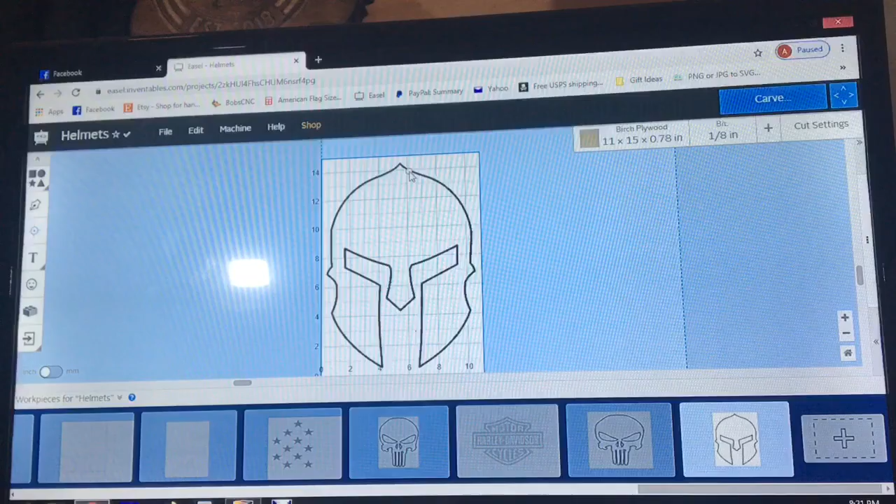Alright, so we have the Spartan outline right here. This is the one we're going for. We're wanting to make the carve that's going to outline the union. The way we want to do it is pretty simple. We want to make sure we're on a line, which we're on this line right here. Let me zoom in just a little bit so you can see better. Alright, so I want to put my union line down here simply because it's just easier when I'm setting up the stripes to be on a line.

So we're going to click it, make sure it's red. That means it's even. And we're wanting to go to that line right here, 8. So let's make it right. If I could get it right, there we go. Alright, so right there, if we make it a little bit over the Spartan helmet, that's fine.

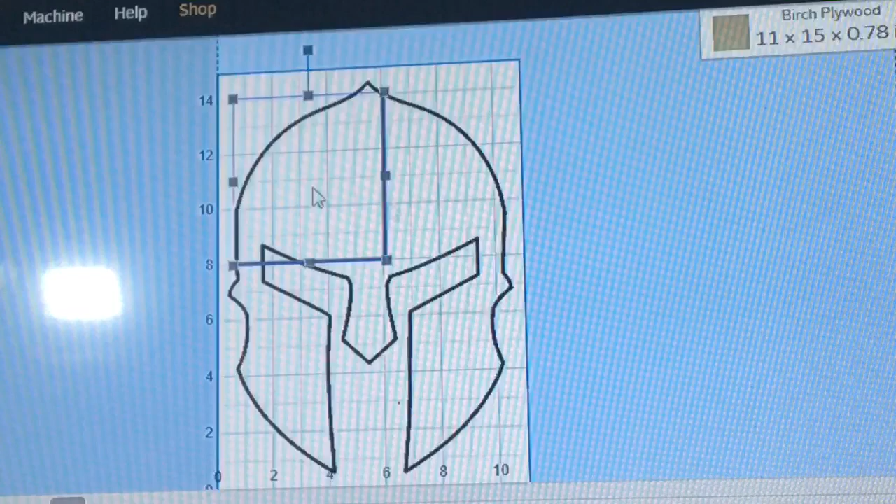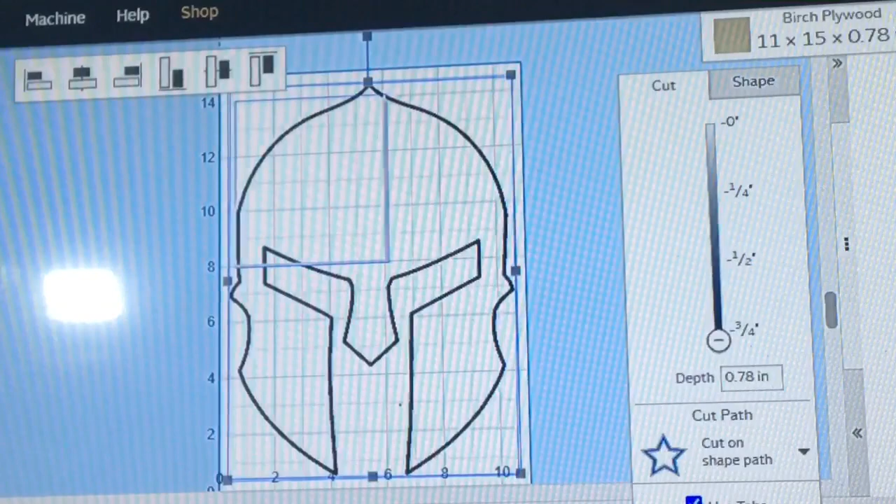Alright, so what we want to do, and bring this over here so you can see it, we're going to set that line to 0.05, like that. Alright, that's the first thing that we want to do. Alright, so let's go ahead and copy this, Control A, Control C, and we want to make 4 more, can't see it, but 4 more basically projects of the same thing.

Let me zoom out. So down here, you want 4 total, not 4 more, but 4 total. And so what you'll do is you'll copy this thing into all of them. Alright, so on the first one, because the first cut we want to do is just that line. We don't want to cut out the Spartan helmet yet, so we'll delete that. Alright, that left that union mark still there. That's going to be our first cut.

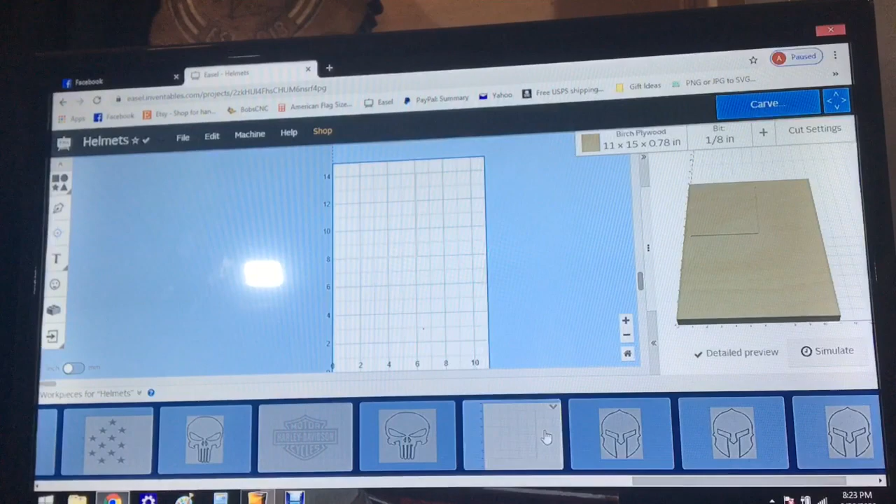So let's go over here. This is the exact same, everything's in the exact same spot as the other one. Alright, so now what we want to do is, because we're using a 1/8 end mill bit, we want to kind of do 2 cuts in a row where it's the same bit, so I'm not having to change it out. So what we're going to do now is we're going to do the stripes that we're going to be cutting out. Now, the black that you see right here is actually going to be the natural color, because I'm going to be staining it.

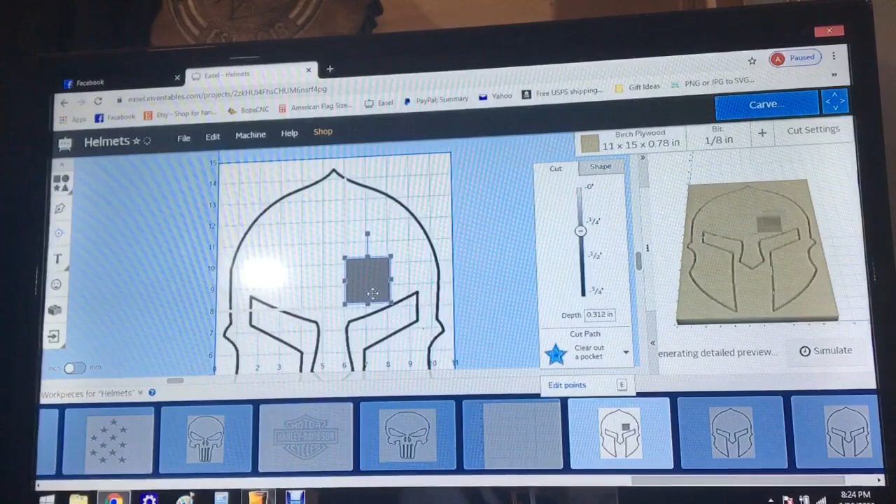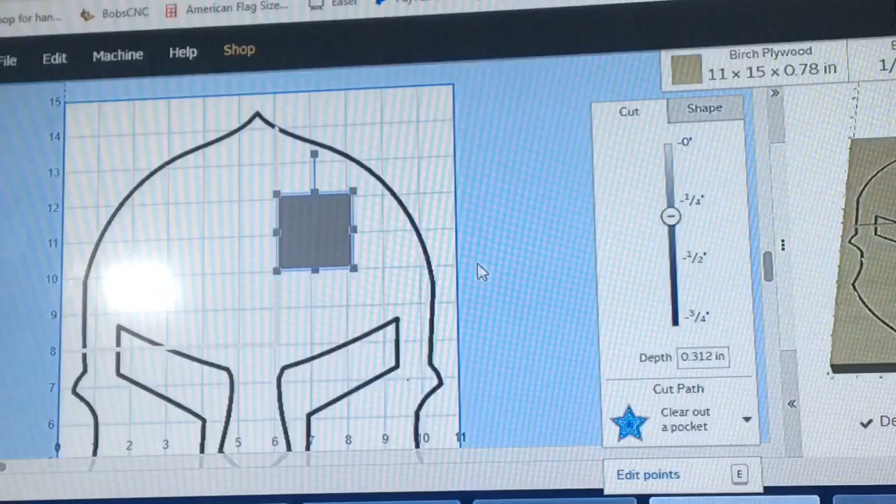So you want to put these stripes where the natural color stripes would be. So we know that first stripe right there equal to the union is red, so we don't want to carve that. So we're going to make our stripes 2 inches wide. So we know we want it right here. So let me zoom back in. Alright, hopefully it doesn't autofocus the whole time. Looks like it is. Alright, so let me zoom back out just a touch, and maybe it won't auto zoom.

Alright, so we want to use the shape tab to get it just right. So this spot is right at 12, so we want to make sure that number is 12, and it's going to line up perfectly with that. And the bottom of this stripe is 10, so we want to make sure this is changed to 10. Alright, so we know now this is perfectly in this area. So let's go ahead and spread it all the way until it gets past that just a little bit.

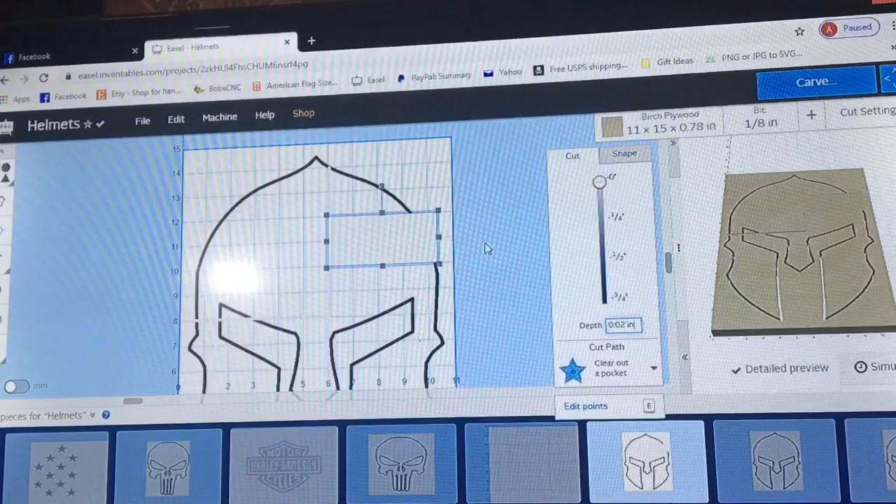Alright, so let's go ahead and change the cut, and we're going to change it to barely taking off any, so I want 0.02. Alright, now let's go ahead and copy this and paste so we get another one. Control C, Control V. Maybe I can click on it. Control C, Control V. There we go. Alright, actually I don't need another one up there, because as you can see, since our stripe is 2 inches, this block represents 1 inch, and that block is a 1 inch square. So I don't need any above it.

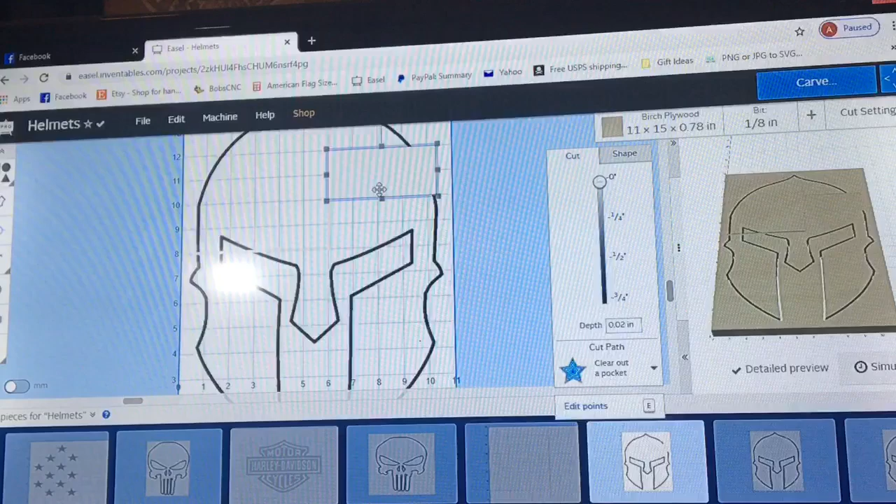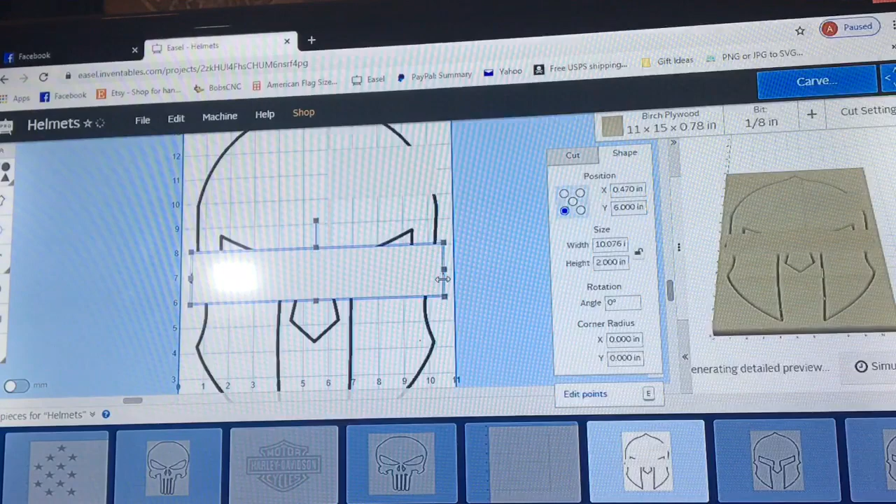So now that's red, so I know this one's going to be natural, so I'm going to have to cut that. So let's Control C, Control V that again. Let's bring it down here as close as possible. I'm going to go back to the shape tab. Alright, this one doesn't really matter on these ones. It's this one that matters. We want it right on 6 so it's even. Alright, and let's stretch it all the way across so it covers everything. There is going to be some wasted carved areas. I'm sure there is a way around it, but I'm not getting into that right now.

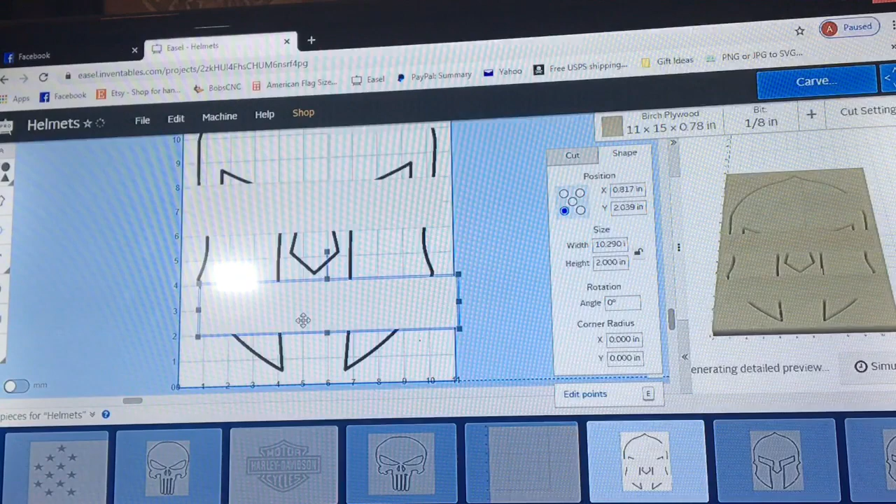So we're going to Control C that, Control V to make another one. So we know that one. So that's a 2 inch stripe. This is also going to be a 2 inch stripe. So let's get this one. This one's going to be right at 2. That way we know it's even. And we can bring this in just a little bit, so that we are eliminating some of the brackets.

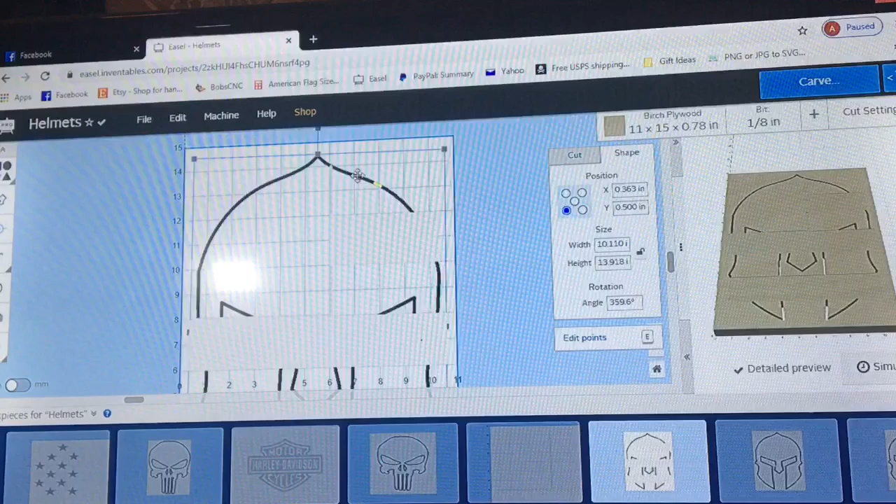Okay, so that's got our stripes set up. I know it looks funny over here, but trust me, it should work. So now what we want to do is delete the outline, delete this, because we don't need that to cut again. That is the second carve we're going to do.

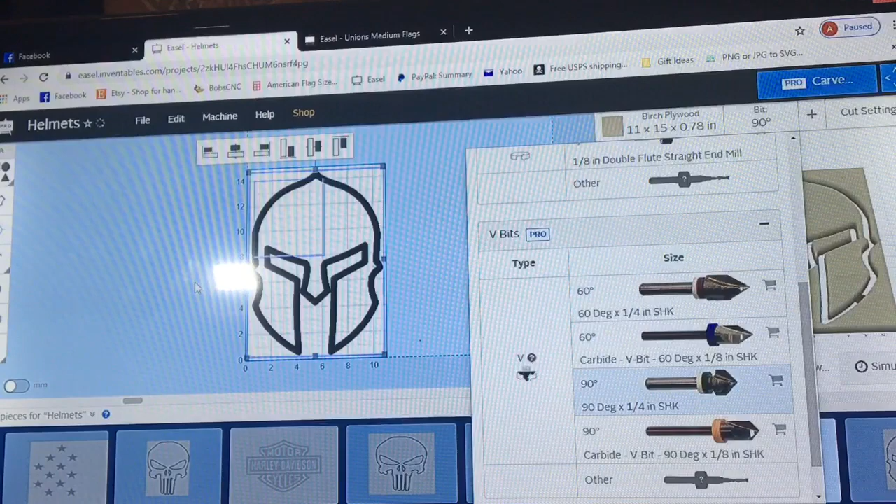Now the third one is going to be stars. Let me go ahead and open, oh, wrong thing, hold on. Go ahead and open up one of my star ones, just so I can get the star. Have that loading. So this is where we're going to want the stars. Now this one, we're going to have to change the bit to a 90-degree V bit, right there. Just ignore all this craziness right now. I went ahead and got the whole union.

Sorry for the autofocus. I do not understand why it's doing it.

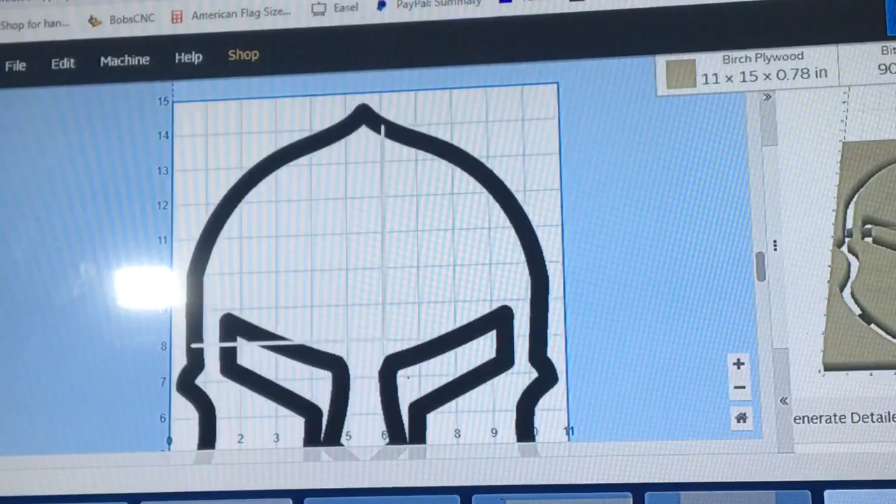Let's go ahead and zoom this in just a little bit, because we only need this top portion for this. Let's move this over just a touch so it's center screen. Now we're going to paste the stars that we did. It's going to be all over the thing, but we want to center it, or kind of make it so that it's on the edge correctly. So we know this, and then click off of it.

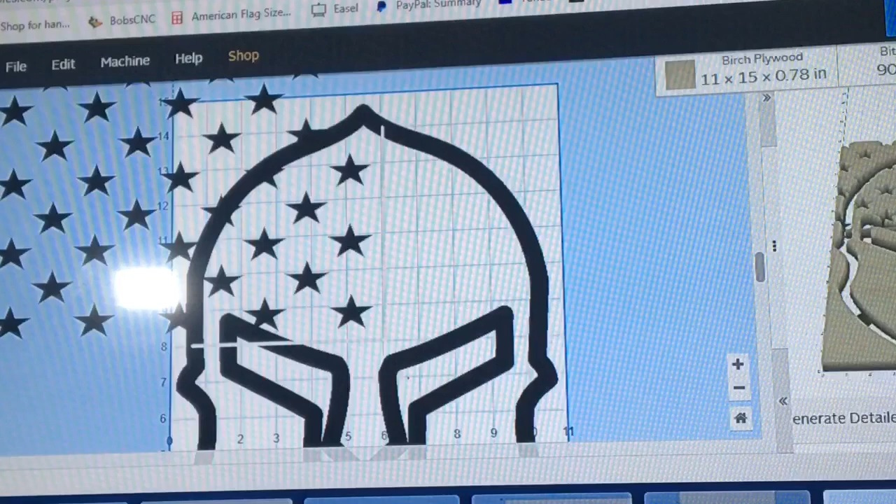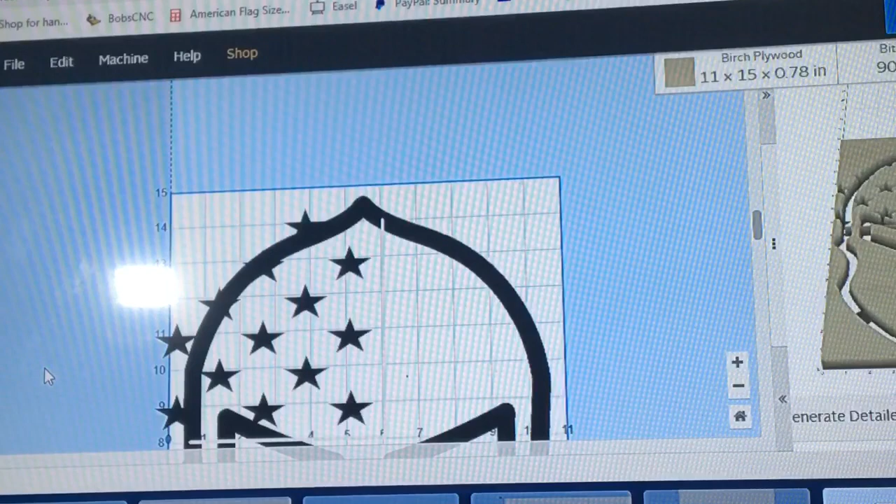So any of it that's touching that line except that one can stay, because it may carve some of it. So let's go ahead and get all these, delete those, delete these, this, and then these three right here. I'll leave those just in case. It may be some wasted area. Actually, I may delete that one, because I'm afraid my clamp may be in the way of that one. And that one, really. I'll delete that one too.

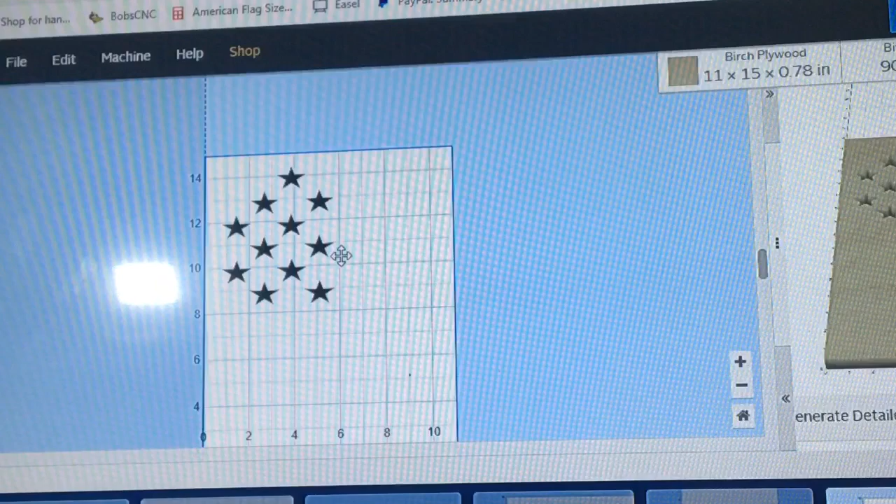Okay, so now, zoom out so you can see we got that. Let's go ahead and delete all the points we don't want to carve. So that's going to be that, and that, and now we're just left with the stars. So that's our third carve. Our fourth carve is going to be this last one we had. We've got to make sure we've got the right bit, 1/8 bit, yep. Let's take this one out, because we don't need this anymore. Click off of it. Delete that, and we'll leave this right here.

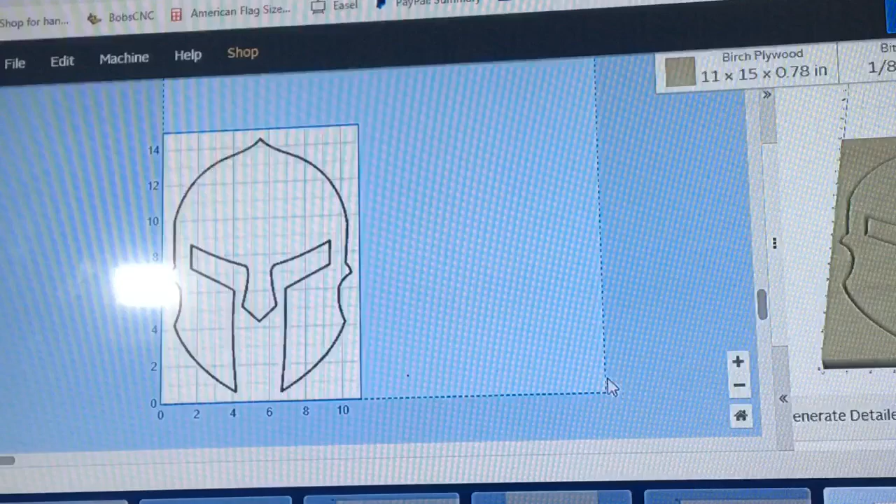So that will be the fourth carve. Actually, I'm going to have to do something else on the CNC machine, because I forgot to put something underneath the board, and when you do cutouts it's good to have something underneath it. So let me save these to show you how to do it real quick. I know I've shown it in other videos, but I'll do it again. Once you're done designing your project, you hit machine. This is with Bob's CNC and using UGS as the controller. Generate G code, export G code.

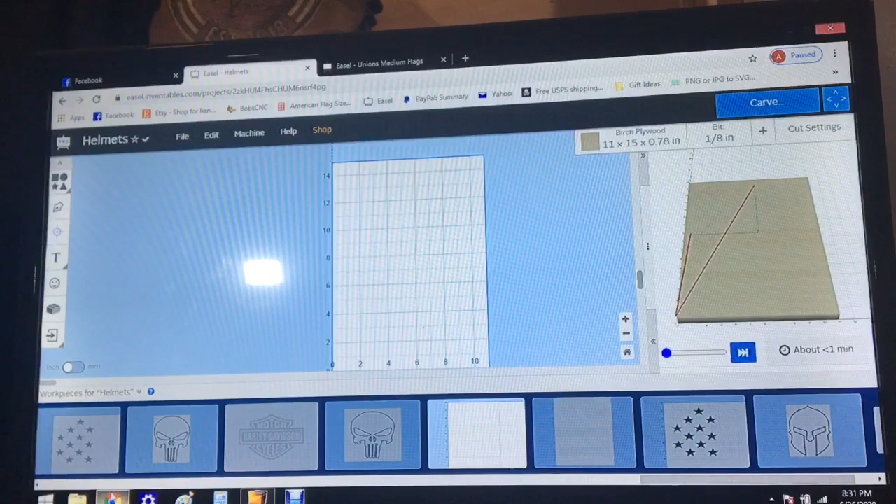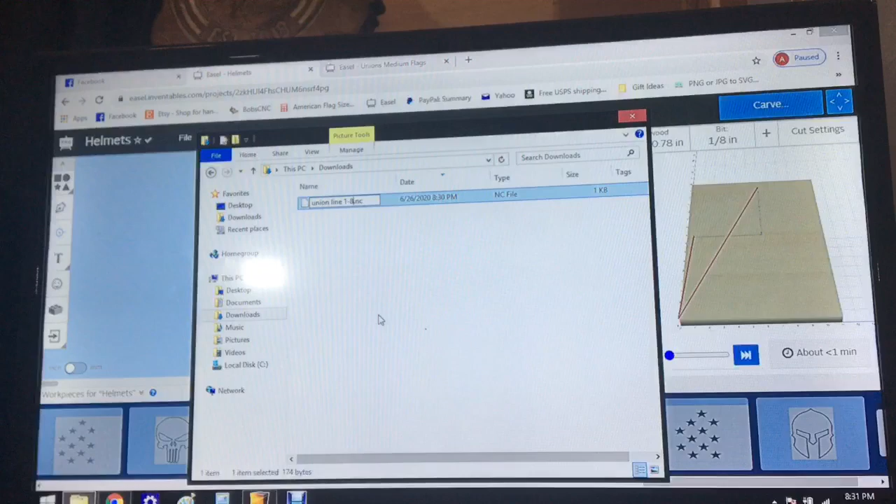Let's zoom you out a little bit. Come on, zoom out. There we go. We exported it. Now let's change that one. Let's make sure we are doing it right. Actually, let's delete all of these just so I'm not getting confused. Rename this. It's going to be Union Line. And I'll put 1/8, just so I know it's a 1/8 bit. Now let's do that with these other ones.

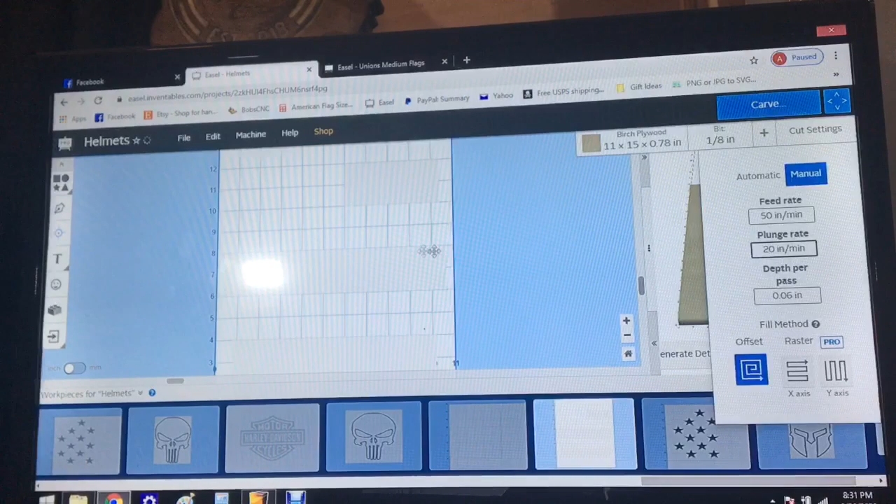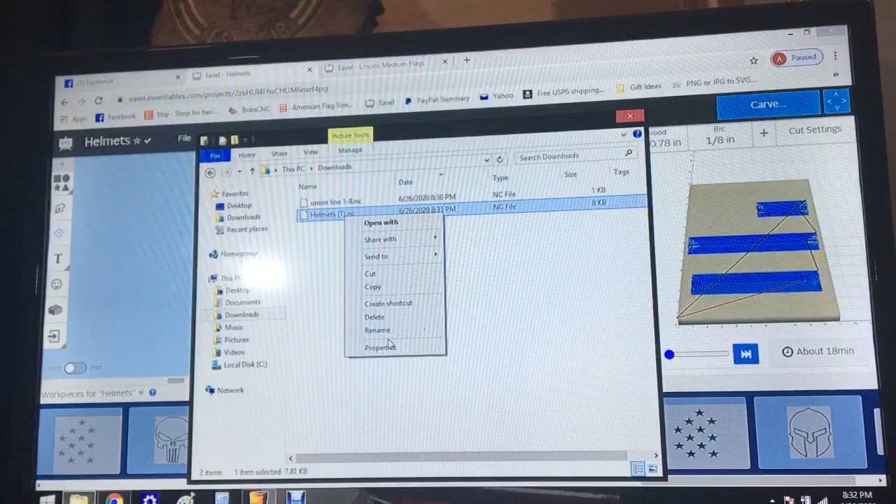Machine, Advanced, Generate G code. Actually, before I do this one, let me double check the cut settings, because they like to do it really slow. Yeah, so let me change that to 20. I know it's manual, but let's do that at 20. Advanced, Generate G code. So it's an 18-minute carve. Export G code. Let's go back into downloads. Let's delete that one, because that's the one I didn't want. It's the newest one. Stripes, 1/8 for 1/8 bit.

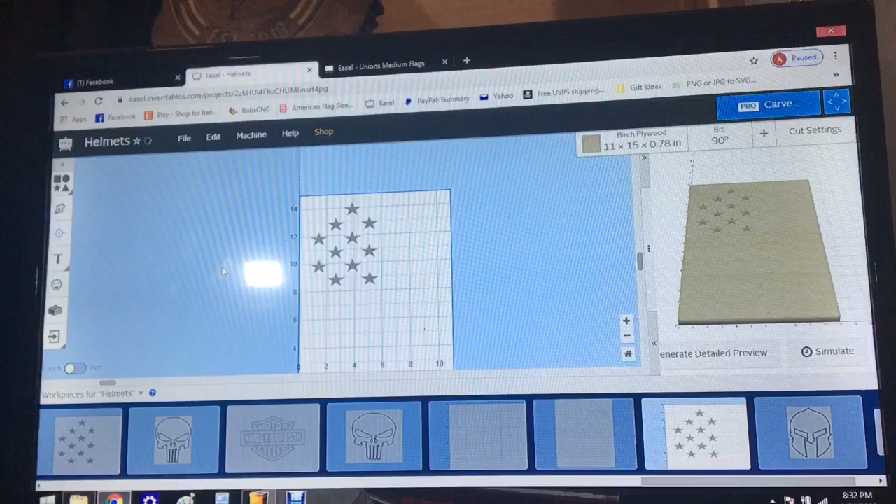This one, I do want to change the depth of these stars. I don't want them deep. I run my stars at 0.25. Some go all the way through, and it gives you great stars too, but I've always had good luck with 0.25. So we're going to machine, advanced, generate G code, export G code. Let's go into downloads and rename this one stars 90 for the 90-degree bit.

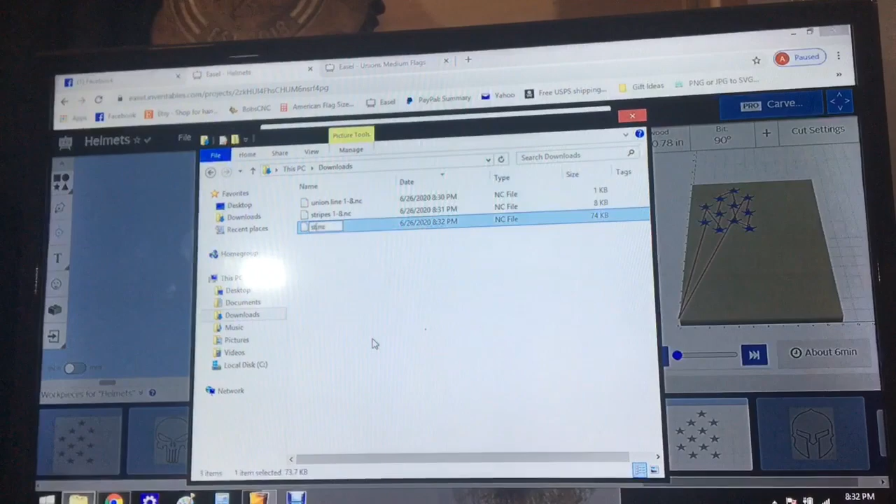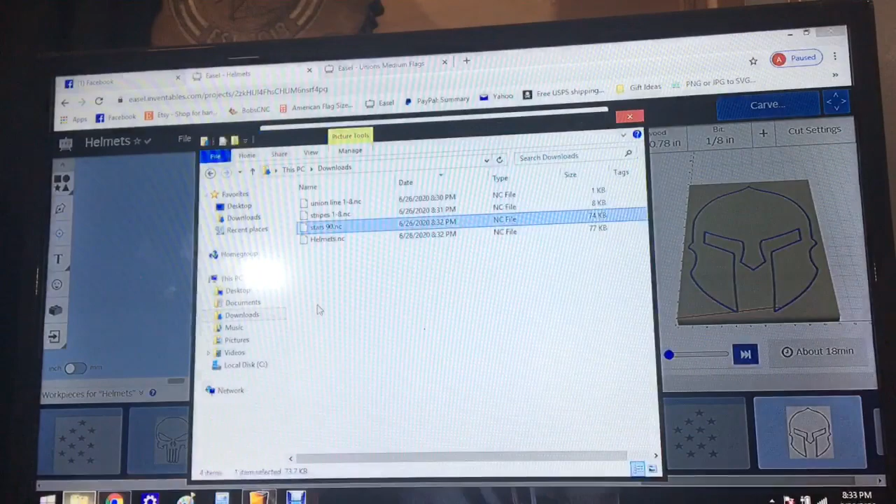And then last but not least, let's check the cut settings of this one again. For a cutout, I'm okay with that being 12. And let's see how long it takes. Yeah, it's just 18 minutes, that's fine. Alright, let's change this last one. It's going to be Spartan cutout 1/8. Alright, so we have all those done.

So let's go to UGS. I already have it connected, but I'll disconnect it just to show you. Make sure you have the power turned on and the USB cord plugged into your computer. And right here, I know mine's COM4. We're gonna hit connect. You're always gonna get that alarm when you first start.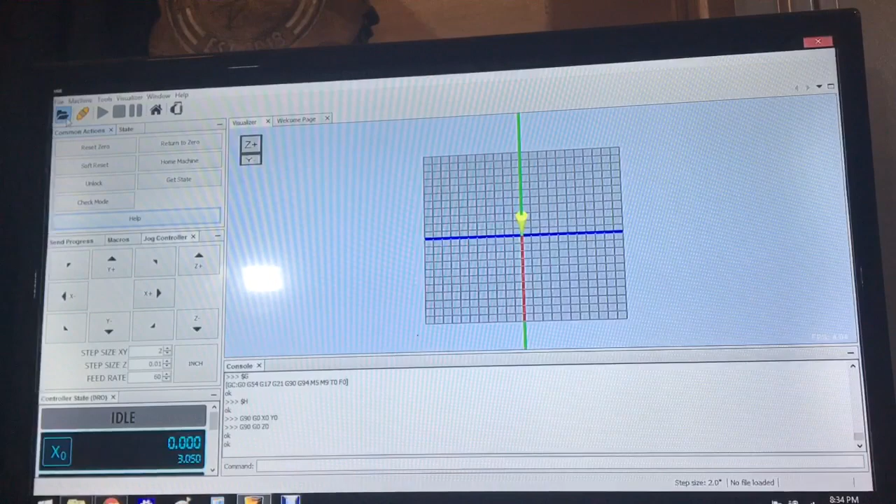We go to where we saved all those, which I think was just in the downloads folder. First one is going to be the union line. We're gonna go upwards. So this is the first one, that's the last one. So let's go union line. Very simple. So let me go ahead and take the board off, put something underneath it, and then we'll get started.

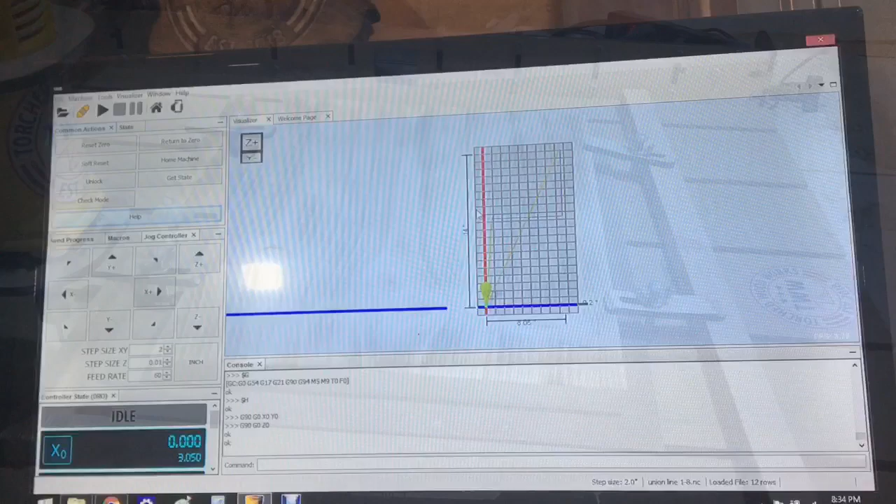All right, so let's get it close to the center point, which is this bottom left corner. Not too far. All right, so now that we got it, that looks good. We're gonna reset to 0. Now raise it up, and now let's check our Z. So let's move this back up to, and we'll do 2.

We're going to check a couple different points, but actually with this one we really don't need to, because it's just the outline of this. So we're kind of close to where the outline is going to be, so let's go ahead and start lowering it down. You want it so it just catches this. Alright, so it's just catching it right there.

So, alright, so let's go back. That went too far. No, perfect. Alright. Gonna reset. Alright, so now we're ready. I'm gonna go ahead and start the cut.

Alright, so that was really short, obviously, because I just had to do this one line. But it marked out where the union needs to be, and the reason I did this step is because now I know where to stain. Yes, they're gonna have a line right here separating the union, but I'm not really too worried about that. I want to see how it looks. So I'm going to stain this top corner blue, and the rest of this is going to get stained red. And I'm keeping it on the machine when I do it.

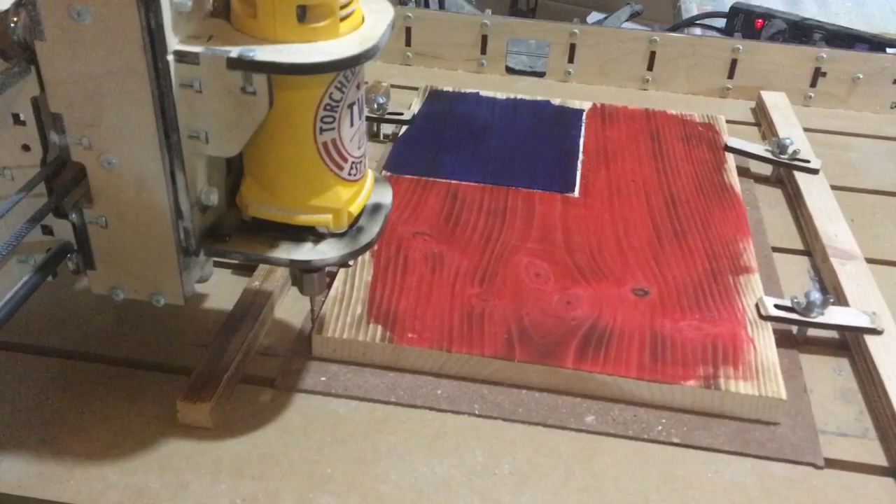Alright, so now that it's mostly dry, there's one spot on the blue that's not dry. We're not carving on the blue. So we're going to hit return to 0. And because I want it to go slightly deeper, so it gets out any of the stain that got into that little channel, I'm going to lower the Z down by 0.02. And then we're going to hit reset 0 again. Alright. And then we're going to run it.

Alright, so the next thing we want to run is the stripe, so we're going to load that into the computer. We're going to return to 0. Alright, so we're at 0 again still. So now all we have to do is run it. Now this is an 18-minute carve, so I'm going to do it in time-lapse format, and we'll be back.

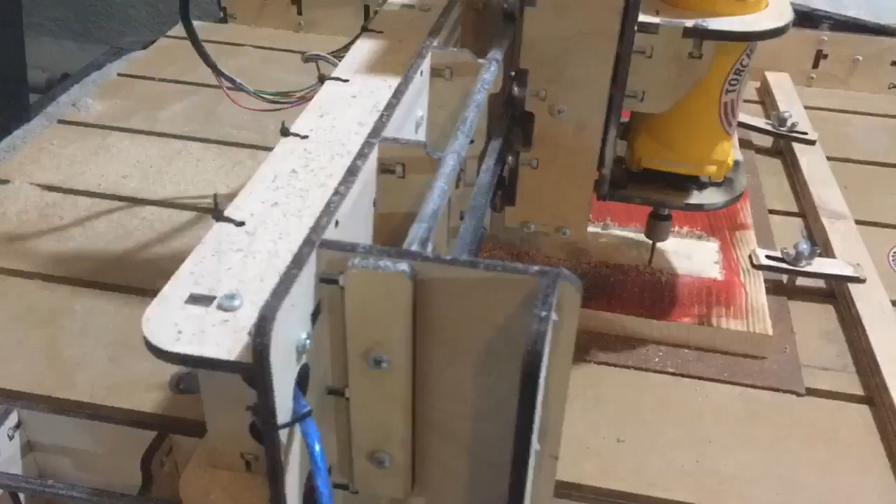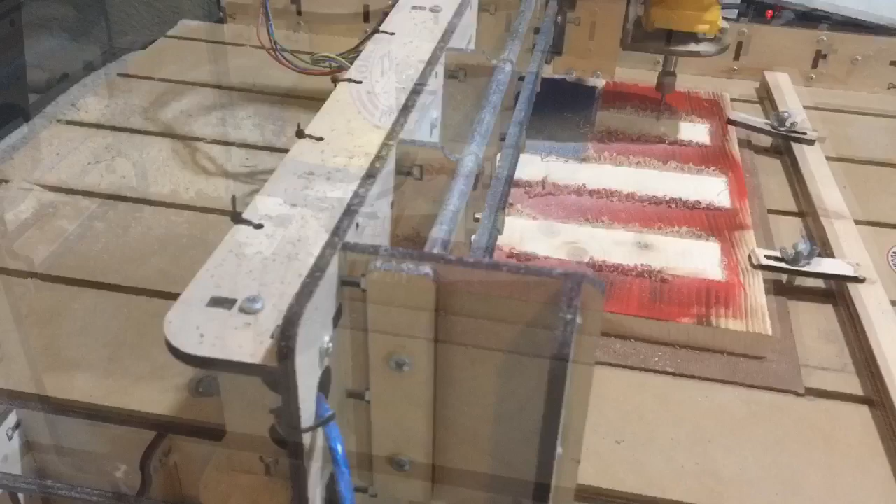So this is the result of using an upcut bit, but you know, it is what it is. I'm gonna torch these anyway, and torching it will get rid of most of these that sticks, but it just looks funny. So there's a ton of this crap. But anyway, let's go ahead and change the bit. Now we're gonna change it to a 90-degree V bit, and we'll get started on the stars.

All right, so now we're gonna check the zero, the depth on the zero, and I'm actually going to check it where the stars are going to be. That way we get the most accurate reading. Alright, there we go. Sorry for this fan noise, hopefully it's not too loud. Let's check it one more spot. Pretty good. It's a little bit higher over on this side, but that's okay. Alright, so now let's put it back. We're going to get it back to its spot and we're going to carve out the stars.

Alright, we got the stars cut. I decided not to run the V-bit through it because this stripe right here went up to that perfectly, and this one wasn't that bad. So once I torch and get all those little fuzzies, I think that's going to be perfect, and plus I didn't want to ruin that edge that I got right here. So I'm just going to run the last one, which is the cutout, and then we should be done the CNC portion of this.